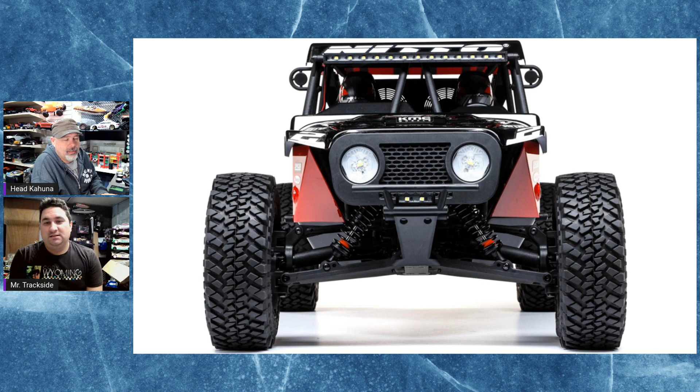So the reason it's got so much length off the back end was because of the desert style running it's meant to do. Yeah, it's definitely like the real thing. If you take a look at Chris Currie's actual truck and compare the red and black one, they're so well done. They did a really good job on this one.

One thing they did miss was the grill on this one. I noticed that when they had the two side by side - Chris Currie's has the up and down bars in the grill. The reason for that is because this body that Horizon's put on is not licensed, whereas Chris Currie's body is licensed by Jeep. So they couldn't put the vertical slots in, they put something else in. I pretty much guarantee some 3D printing company out there is going to make a grill insert that will fit in here to make it look like the Jeep, like everybody wants.

I'm very impressed that they put LED lights in the actual headlights. That's a pretty big new thing now with all the brands putting in those little LED lights everywhere - everybody's got LEDs on the rear as well. That's the other nice thing, including it on the back, because when your car is going away from you in the dark it's nice to know what direction it's actually going. Yeah, I know that from drag racing, which way it's going.

I noticed there's a lot of scale bits on the body that I think won't last very long. The little fire extinguisher up on top by the number 2 there, that'll be gone in no time - mine'll be gone on the first rollover, it'll just explode off of there.

It is very high compared to Baja Rey, but there are several differences on this platform, we'll get into a little bit more here. I just grabbed a whole bunch of pictures for this guy. The scale stuff's really neat on it. I would run it without a spare on the back myself because I'm going to carry the spare in my pocket or in my toolbox, but for the scale realism look, yeah, the spare looked great.

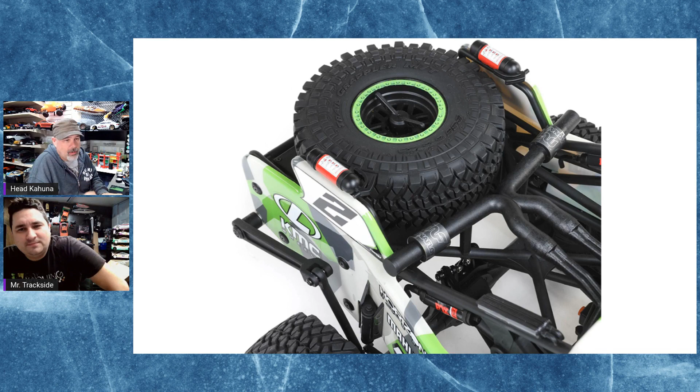Yeah, let's get to the comparison. Functional spare on the rear - that seems to be a big deal nowadays. Is that the exhaust scale detail on there? Go back - yes it is. Magnaflow exhaust, Magnaflow exhaust. A lot of detail in there, there is quite a bit of it.

Let's go all the way. Here we go, so this comparison of the three platforms that Horizon made in the Rey line. Now the Rock Rey is discontinued, gone - you cannot get it anymore. It was a pretty cool platform. It was brutal for ballooning tires, and brutal for flipping over because the wheels were so tall that it would traction roll, but it was a lot more of a rock racer look to it, in my opinion.

Then the Baja Rey has a whole lot of cage to it, but it's all lower than the cage is on this. Now, these three pictures are not to scale, just so you guys know - these were just what I could find that were similar, so you guys could look at them. As you can see from where the figures sit on the Hammer Rey, which is the top picture, they sit quite a bit higher up than they do in the Baja Rey. Of course there's a short course truck style, and then you've got your rock racer U4 style, which is what the Hammer Rey is based on, which is getting more and more popular seems like every month.

So there they are with the bodies. Both the Hammer Rey and the Rock Rey were open wheel concept, and the Baja Rey was your short course style with fenders and everything, which in my experience with the Baja Rey, because it's a really quite soft compound tire they used on there, those suckers would balloon out and hit those fenders and just shred that. Luckily they were separate pieces - they weren't all one body. So if you blew apart your front fenders, you just replaced the front piece, you didn't have to replace the whole thing. That's always nice, which was kind of cool.

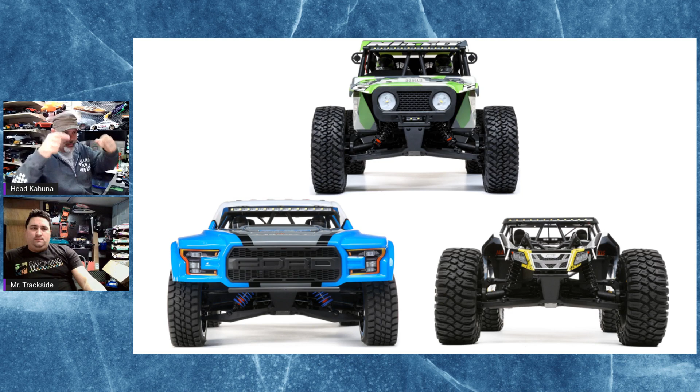Yeah, I've seen that on the previous slide. They're quite a bit longer too. There it is, yeah. It's still plastic body shocks, though - I wish they had gone with aluminum body shocks. It's aluminum cap and plastic body, which is not too bad. Like I've had the Traxxas shocks in the past, and you change the cap out from plastic to metal, and it seems to solve a lot of problems.

You also don't get as much binding and friction inside the plastic body shocks as you can with aluminum bodies. Sometimes, if anything is slightly bent with an aluminum body, it's going to bind every time. If it's a plastic body, it'll usually give you a little bit of play, a little bit of freedom.

So you can see with the tire size and design, it's a narrower, not as tall tire as the Rock Rey was, but it is still taller than the tires on the Baja, which we'll get to in a second. So there's another look at the front suspension.

So what are they sharing in parts? The lower A-arms they share with the Rock Rey. The upper shock tower they kind of share with the Baja Rey, but it's not the same part, it's a different part number. And similar, as you can see, the Rock Rey shock tower is absolutely nothing even close to the same.

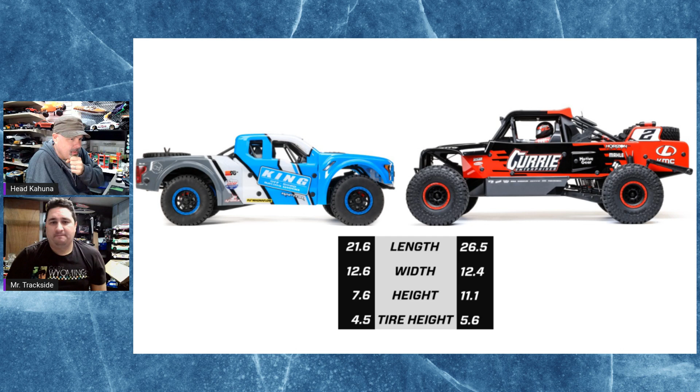So this is the comparison they do with the Baja Rey and this new Hammer Rey. Now, you and I were talking about this earlier. The differences between this and the Traxxas UDR are closer than the differences between the Baja Rey and this new one. You talk about this, I'm going to find the UDR spec one here that we were talking about.

Yeah, we got here. Here's the tire height. I knew it was somewhere. You found it, okay, 5.6 right on here. That's where it is. Where is it? On the very bottom line, tire height. Well, holy crap. Wow, okay, never mind, I just need to learn to read. Yeah, I knew it was on your slides. I'm like, what? Where is it? Where did you see that? Oh, that's where you saw it. Okay, you had it, I had it right there.

Okay, so Baja Rey. Now, this is overall length that they're talking about, okay, and they're not talking about wheelbase in this. This is overall length going from the front bumper to the back bumper. And then with the new Hammer Rey, it's from the front of the tires to the back fake wheelie bar, or the fake sway bar, okay. So 21.6 inches as opposed to 26.5 inches.

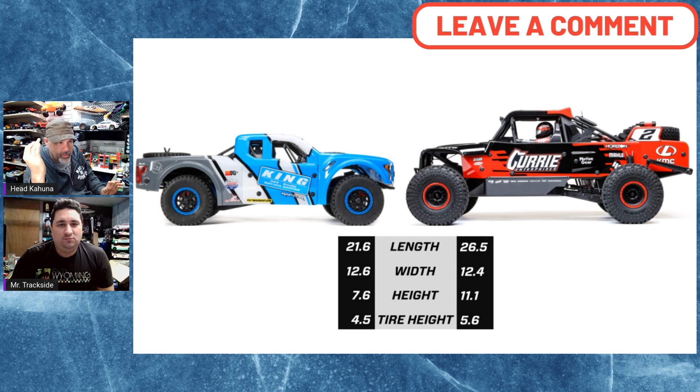Height, huge difference. That's a big difference when you're talking plastic cage. Yeah, have a little more roll to it probably. Even just looking at this picture right here, you take a look at the height of that spare tire and all that extra stuff, you're what, an inch taller, 2 inches taller almost on just your CG, your overall CG. So I think you're going to see a lot more rollover issue with this, even with the longer chassis, because it's just going to be that much.

But compared to the Traxxas, which I'll put up on the screen now, this one is saying 26.5 inches overall length for the Hammer. Now the Traxxas is 27.32 overall. This is the UDR. UDR is considered to be more of a 1/7 scale, maybe. I don't know if you'd say 1/8, but I think most people kind of call it more of a 1/7 scale.

So if you guys have watched any running videos on this guy yet, we don't have one, so I can't do a running video for you. I wish I did. But if you watch any of the running videos, a lot of people say they're calling it a 1/10 scale, but it is way bigger than 1/10 scale really should be. So I think their scaling's off. Again, scaling's definitely off.

But it all goes back to the racing scene and how they call, like the buggy I have, 10th scale. Yeah, it's not 10th scale. Short course trucks, they're more 8th scale than they are 10th scale.

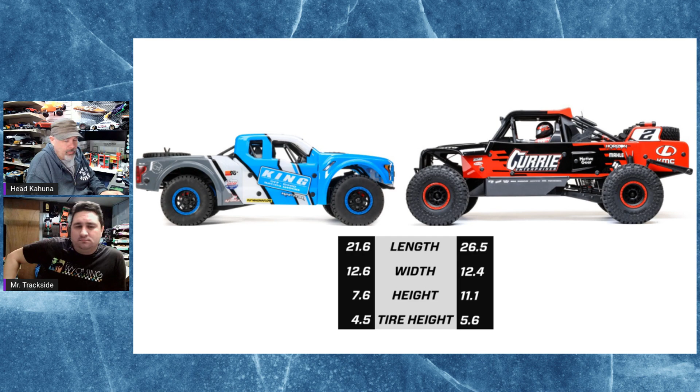Absolutely. So let's take a look here at the width. The width is pretty even between these two, so you're 12.6, 12.4, so Baja Ray and the Hammer Ray are pretty close. Then we switch over to taking a look at a UDR, UDR is 13.5, so it is a fair amount wider. It's a full inch wider. So there's a big difference there.

And then if we look at actual height, 7.6 inches as opposed to 11.1 inches. And then we jump over to the UDR, which is now 10.29. So it's taller than the UDR, but not as wide. So once again, more rollover.

Rollover king. Because the UDR is also on a short course style wheel, where it's got the larger diameter rim on the inside and the smaller diameter on the outside, right? Whereas this Hammer is on a 2.2 style, it's even on both sides, all the way around. More cushion. So we've got that. This is more of a comparison off of Horizon with their actual cage design between the two.

If you notice on the Baja Rey, there's a lot of drop down and hanging out the back, but there's not as much weight. When you look at the Hammer, it's a lot more rigid and strong looking construction, not so flimsy, but there's still a lot hanging back there. That thing's got a big ass.

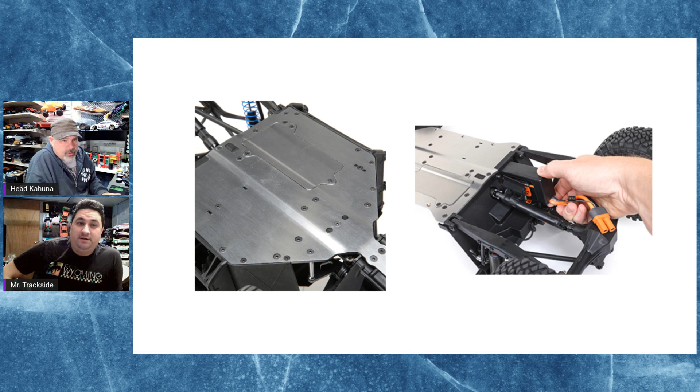They still have the same setup for changing out the motor, where that bottom panel pops off and you can access the motor and drop it out the bottom of the chassis, change your gear mesh, change your pinion, whatever you got to do, and slide it back in. That's all fine and dandy and works great, except for the fact that you got to deal with the wiring clipping in the way they've got it held in there.

Let me see if I can show a better picture of it. Okay, so you see how the wiring is coming in - it's zip tied to the top of that upper chassis, and then it goes around and drops in. So when you try to pull your motor out, you've got to deal with that wiring still, which I remember on a Baja Ray was a bit of a pain in the butt. A lot of guys would just basically put a really loose zip tie up there to get more play, but still keep it out of the drive shaft, the main center drive shaft.

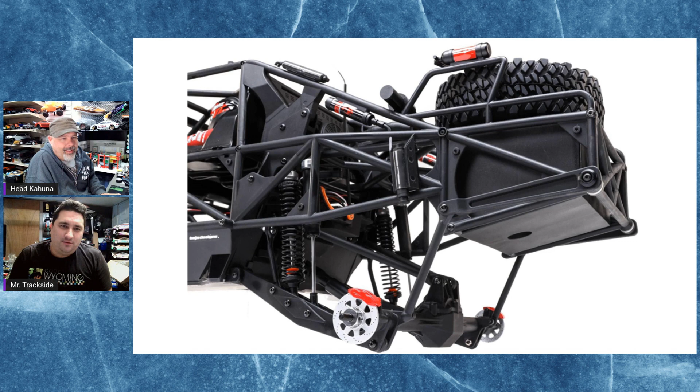So that's a thought. This gives you a bit of a better picture of how it's laid out. There's all that junk in the trunk - oh, scale detail, all that scale detail, right? Huge junk in the trunk. Scale fuel tank in the back there too. These stoppers on here are not real, which is very disappointing. They are plastic, just more for looks as usual, and as you can see there's no rubber stopper or anything. That would have been kind of cool if they were more functional.

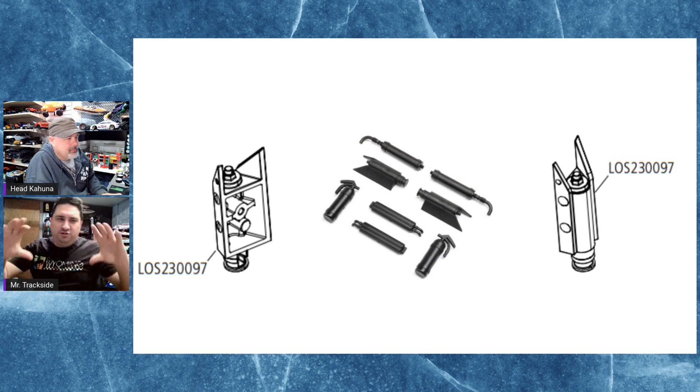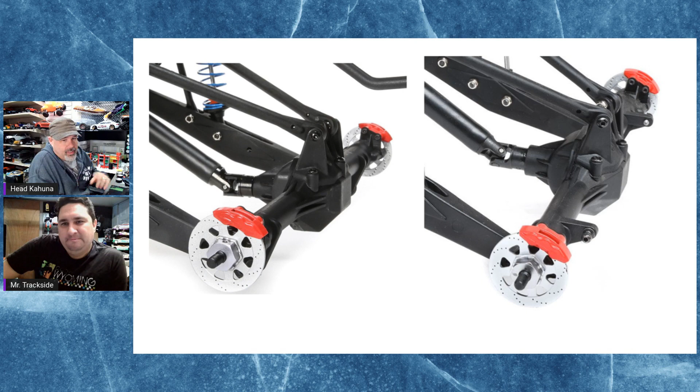Here's the rear axle. This is the biggest difference between the rear axles. On the left-hand side is the Baja Ray, on the right-hand side is the new Hammer Rey. So the big tab that sticks off the back end is for the fake sway bar. Oh yeah, all for show. Not for go.

Now I looked real closely at these universal joints, because the one on the Baja Rey in their picture has a lot more shine to it than the one on the new Hammer Rey. I thought maybe that's because it's plastic, but no, it's still a metal insert. It's the same thing, just not as shiny for the pictures. So it's still a metal universal joint in there, just not as buffed up.

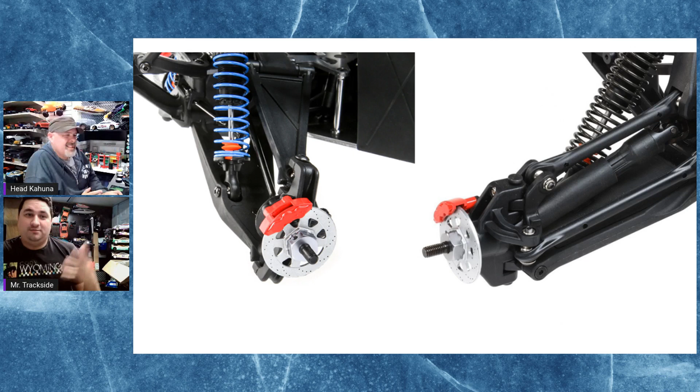Now we're moving on to the next thing, which is part of what you're talking about - these are the spindles, the front spindle. Now because they've gone with the old Rock Ray style A-arms on the bottom and the upper link, and Baja Ray had an upper and lower A-arm setup where the ball was captured, there appears to be more turnability or movement in the Baja Ray setup than there is in the Hammer Ray setup.

For the Hammer Ray steering setup, like you said, there's going to be adjustability since you could change out those for turnbuckles or whatever. Yeah, I'd definitely do that. I personally think that Hammer Ray's setup is going to be a lot stronger because it's not just a tiny ball captured in some plastic. So I think the Baja Ray is going to still be weaker.

If you take a look at the shocks, you can notice the spring. Usually when the spring is further apart, it's because it's a stiffer spring. If you notice the spring on the Baja Rey, which is the blue one, it's quite far apart, so I think it's a stiffer spring. I think this Hammer Ray has a ridiculously soft front suspension - I think you're going to find it bottoming out quite a bit.

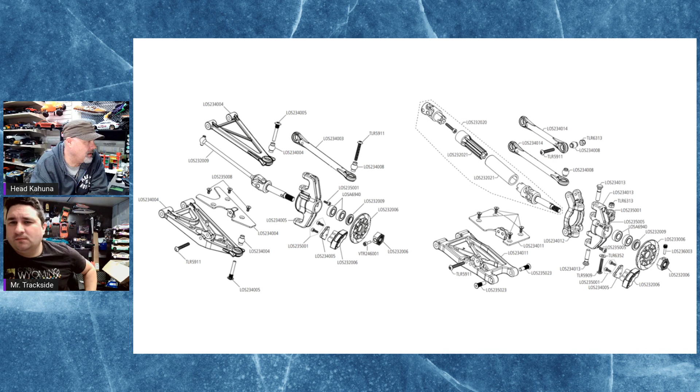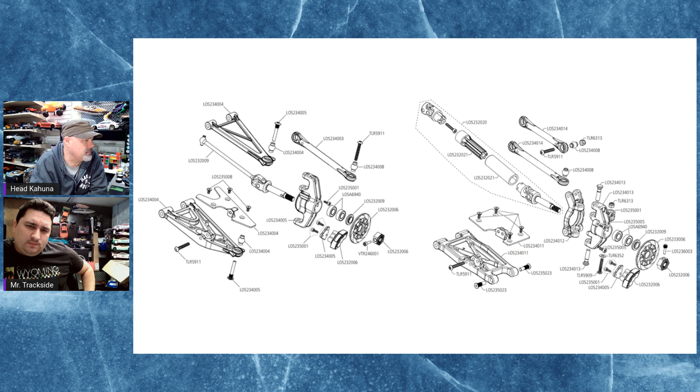Let me see if I can find you a better picture here so I can explain that one. Okay, so if we look in here, let me scroll - why is this PDF always so small? Okay, let's make this bigger for you guys, and I'll put what I'm talking about front and center.

Okay, this is the schematic straight off of the Hammer Rey manual. So if you're looking in here now, I can show you with the arrow, because this is showing up right here where this plastic piece is. I don't know if you guys can see my arrow - can you see it? Okay.

So right here, if you over tighten this screw or you put one in here that is too long, what happens is when you tighten up against this, it sits into this little groove here. This little groove is supposed to lock this in place from sliding in and out. If you tighten that up too much, you stretch this plastic and weaken it.

If you put the wrong size screw in there and over tighten it - and that happens a lot - all it has to do is hold it in there. It doesn't have to be tight, just stopping the pin from popping out. It's not actually a structural piece, it's just a lock screw.

So a lot of people would tighten that up too much, which would cause that to break. That's going to be a problem - you're going to see a lot of people do that.

One thing I noticed in here, because I have Losi race cars, is that in between those two bearings in the front, the race cars put a little shim in there, right here, between those two.

One thing they're missing here is that little shim goes in between, so when you tighten it down to the bearing, it tightens down perfectly and you can't put side pressure on the bearing and crush them out.

And here's the other thing I don't like about this setup, and I wish they had changed it in this redesign. If you notice right here, there's a hole, but the hole is not a pass through - you got a pin here, pin here.

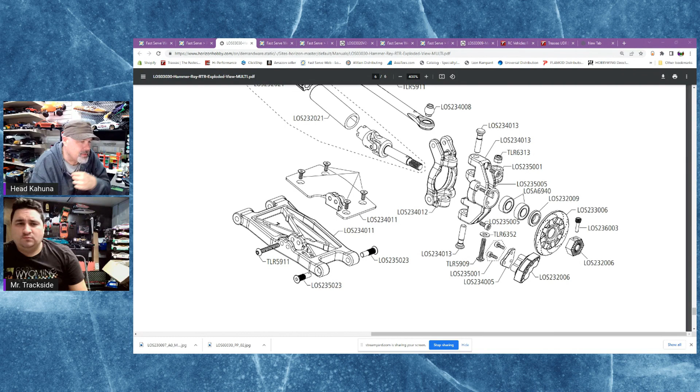You might get a little flex in there and pop out. Maybe - that's my opinion. So then if we go up here, we can take a look.

Also, the biggest difference here - show it here with this one on the Baja Rey, which is on the left. We have the old universal joint, solid axle, all one piece, goes up to a dog bone style that's captured in an outdrive cup.

On the new Hammer Rey, you have a universal joint with a replaceable plastic drive shaft piece in the middle, which is a slip joint, then going out to another universal on the other end. Now they're captured in with a bolt.

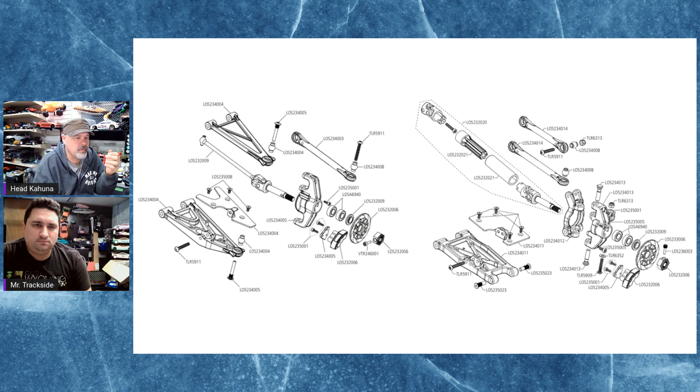So let's go back to this one here so I can show you. They're captured in here with this bolt, which comes in. These things, if you don't Loctite this bolt, they're plagued for coming undone, and you lose your piece, you lose your screw, you lose your drive shaft, and things break.

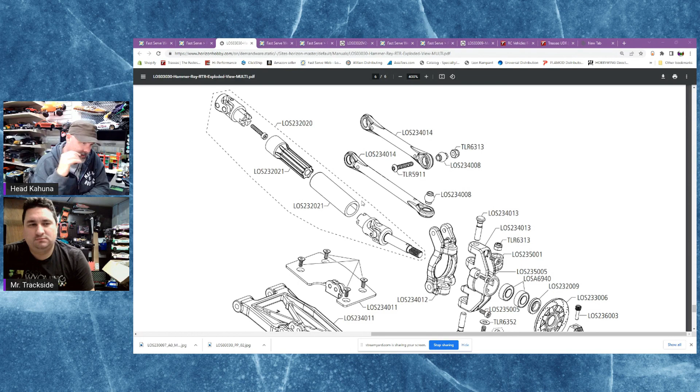But at least with that plastic, I think you're going to get a bit of give, a little bit of freedom. It's not going to be so jarring on the drive line when you land with the throttle on real hard, because the front wheels on this thing are going to spin quite a bit. Remember, this is wheelie action time, this is where you get your ballooning action happening on the top front.

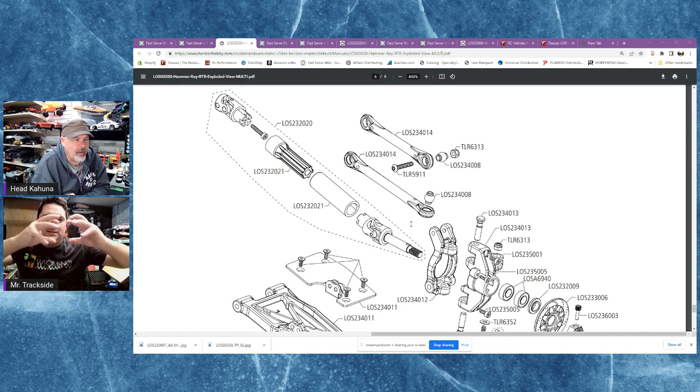I'm not opposed to that because if you think about the mass of the shaft and how it twists, you got the little metal shaft. You're twisting that metal, you're flexing that metal. Whereas you got something bigger, rounder, like those tubes, and now you're flexing that, and it's kind of bigger. Versus this. You get more torque, you should get more torque out of this.

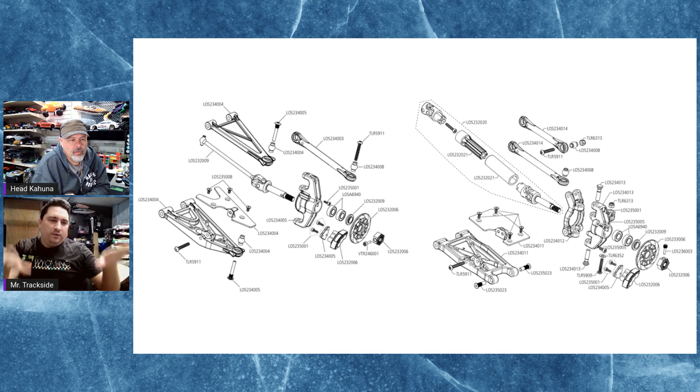Yeah, let's get back over here. You won't bend the shafts. I think that would be a thing there, like you said, you got wheeling up, you hit the ground, and just have that stop, right? You spin so fast and you stop, that's going to be bent.

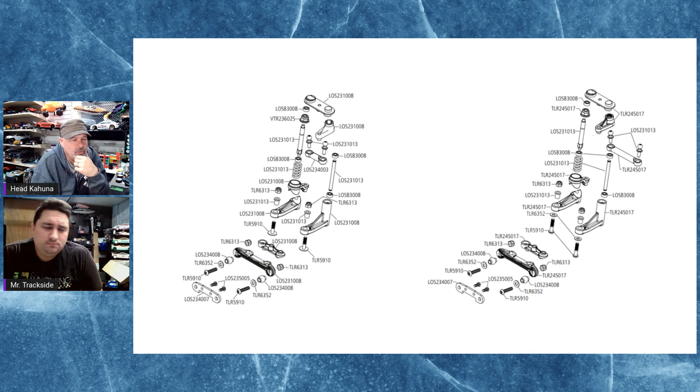I can speak from experience with that particular chassis and the cage and everything on there. If you burn out your servo, it is a pain in the ass to change, because you got to take a whole bunch of the cage off, and it's just a pain in the butt.

So now the Hammer Rey, they've laid the servo down, so it's running flat with the chassis, and it's closer down to the chassis now. There's no more flex. The Baja Rey, it was raised, almost 3/4 of an inch, a plastic riser off of there to hold the servo up, so you had room for your linkage to go. So you got a lot of slop and stuff in there over time.

Now, if you go all the way down back to so many slides, there we go. So this is the new, they say, improved steering. Now, the only thing that I'm seeing any different are the plastic parts at the very top of that. You'll see you've got your 231008, right? That's different.

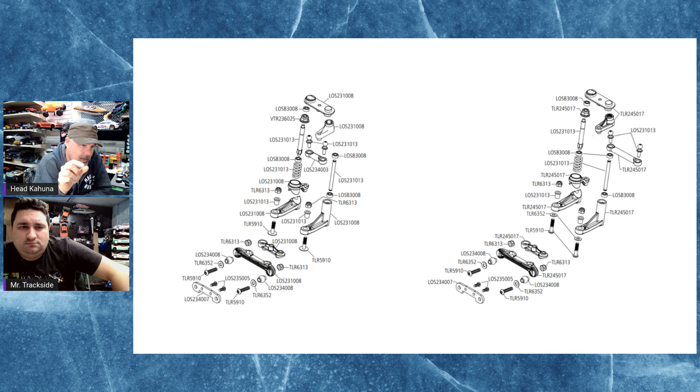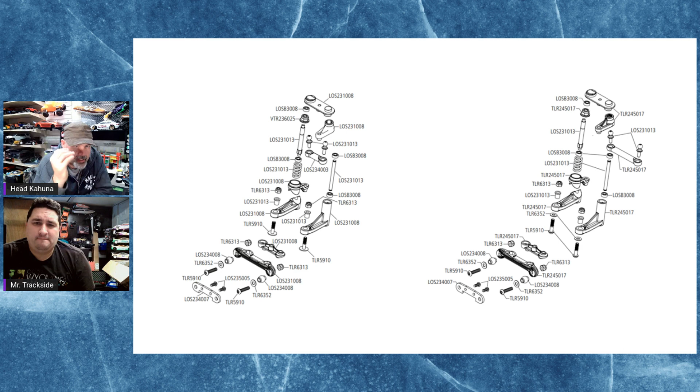So you've got your bell crank, then your ball joint. Ball joint goes to your, what do you want to call that? Turnbuckle? Steering rack? It's not really a turnbuckle, but the link that links to your servo is longer. That's the only thing I see different in here. I'm not seeing a difference in springs, the spring number is the same. The servo saver part is the same, except for the fact that it's just a different number. But like I said, I think picture-wise, they look exactly the same. So I'd really be interested to see what they changed by pulling one apart. I don't think there's going to be that much difference.

I know the Baja Rey had a really bad problem, you could turn it on, grab the front end, and move the wheels because there was that much slop in the steering mechanism. Yeah, so that's my take on it.

I think it's a really cool looking car, but I don't think it's really 1/10 scale. It's definitely a little bigger. I think it's a lot closer to being the UDR killer that a lot of people coined it as when they first announced this potential release, and then Losi said no, it's a 1/10 scale platform, but it's actually not.

It's more like the Rift size. Yeah, there's another one, right? They call that a 1/10 when it's closer to being a 1/8. Really? Yeah, I don't know.

Scale in RC nowadays, unless you're into the uber scale stuff with super scale details and crawlers, but if you're not doing it for super scale realism, you got to have what Traxxas used to call the phantasmic scale.

Phantasmic scale, I still laugh at their Traxxas Summit and the Traxxas Revo. One is 1/8 scale and one is 1/10 scale, both the same chassis, everything. So the only thing I would change on there, I would take those scale brake calipers off, and that would be it.

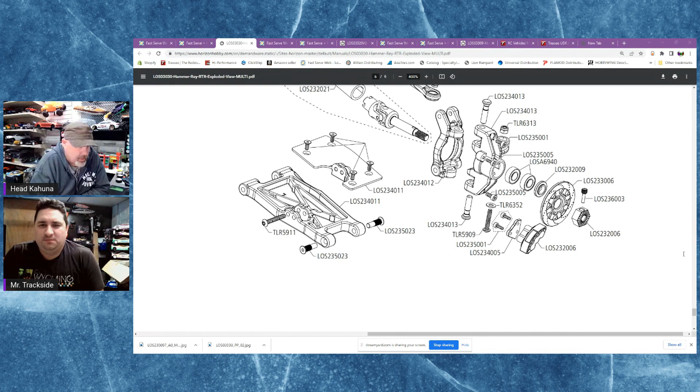Look at this here real quick. So what you're talking about, you can take the entire hex, take that whole rotor and caliper thing right out of this one entirely and just leave the hex. So you might be able to change that up to a 17 mil hex easier than you can on a UDR. The UDR has a different setup.

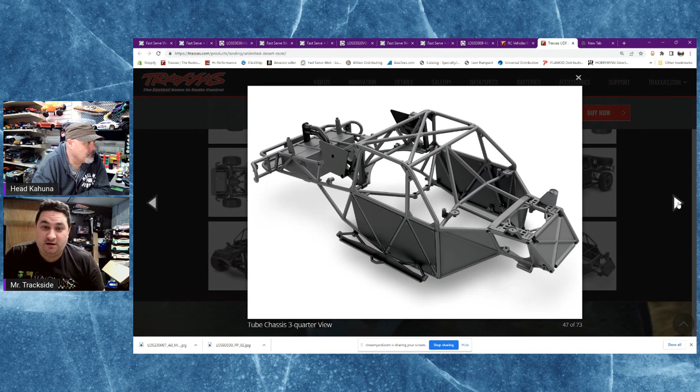Yeah, the UDR's got the dual shocks all the way around as well, plus 2 spare tires, throwing even more weight back there. So comparison-wise, I don't know.

I think a lot of people are going to like the Hammer because it's not Traxxas. There's a lot of anti-Traxxas people out there. So it's like, I kind of like the UDR, but I kind of don't want to buy it because it's Traxxas. Some people really don't want to buy into it, it's like Apple, you don't want to buy an Apple phone because you buy into that whole ecosystem. Or Traxxas, you don't want to buy a Traxxas because you buy into that whole ecosystem.

And the Traxxas does have aluminum body shocks as well, another bonus. But then again, you're looking at the price difference as well. There's a good large difference. Well, yeah, no, not really.

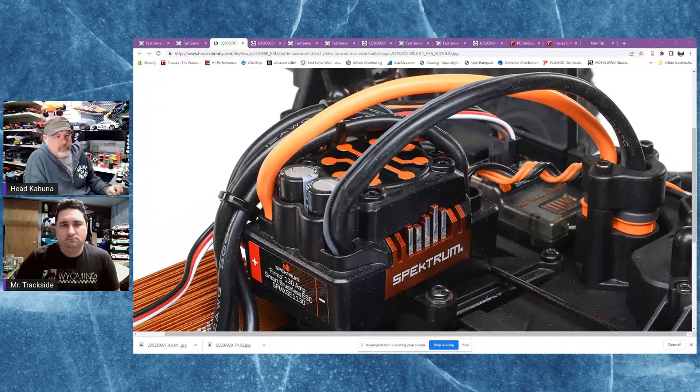So the difference between the Traxxas one and - to the right spot, okay, here, this is the new Hammer. The new Hammer has this, as you can see, it comes out of the ESC. The wires go across the top, and they're going down into this harness, which is fastened into the chassis, so that now you just plug it in from below. A couple things that happen with this that are a real pain in the butt. One, you hit a hard enough landing, you slap that chassis, the plug comes undone. People say, no, that doesn't happen. Yes, it does, because I've been there, I've seen it happen.

But on this one, you can change it out. You can see it's two screws holding it in from the top, you can change it out. You could modify it and make it work into a different style of plug. If I remember correctly, with the Traxxas one, I don't think you can do that, because I think the shape of the housing is actually designed to be the same as a plug - I think it's molded right into the chassis pretty much, isn't it? I think it is. I remember looking at one at the store there, and I was like, you know what, it's horrible, horrible. I'm just waiting for the companies to all do this.

5mm bullets - you want to know the reason why they'll never do that? Because people are dumb and plug them backwards? Yep, that's exactly the reason. It's not idiot-proof enough, and there's too many meatheads out there that'll be like, big battery - oh no, battery on fire, oh house on fire, I'm going to sue.

Yeah, like, where are my RC friends? Where are my RC friends? Yeah, true, right? Sad, no.

Oh yeah, but that's when you get the reverse polarity ESCs in there, which are available. So anyways, that's - I think it's kind of cool.

I like it. Do I like it more than the Traxxas UDR? I like the Traxxas UDR as well. Do I like it more than the Baja Rey? I'm not sure. I like the Baja Rey because it is smaller. I like the smaller, I don't like gigantic RCs. I like 8th scale, 10th scale - that's what I've grown up with, it's what I've used the most. It's the genre that's been around the longest for me in the 35 years I've been doing this. That's been the most common scale to me.